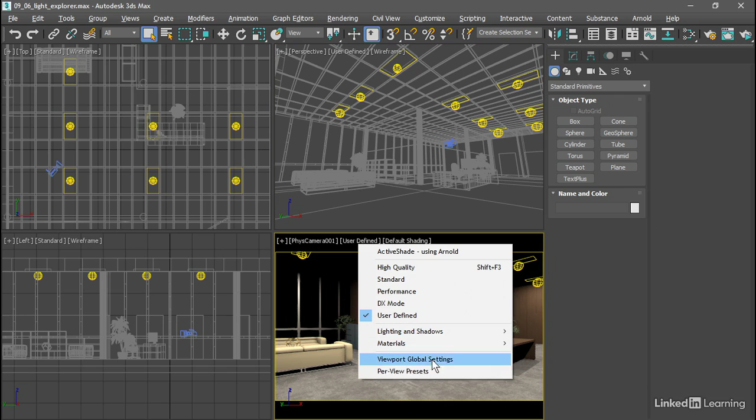Therefore, to see the effects of making changes in the Light Explorer, we want to set up the viewport so that it matches the production rendering as closely as possible. And we do that using the Per View presets. As we discussed earlier in the course, in the Per View settings, we just want to make sure that the rendering level is advanced, and we are illuminating with scene lights, unlimited lights.

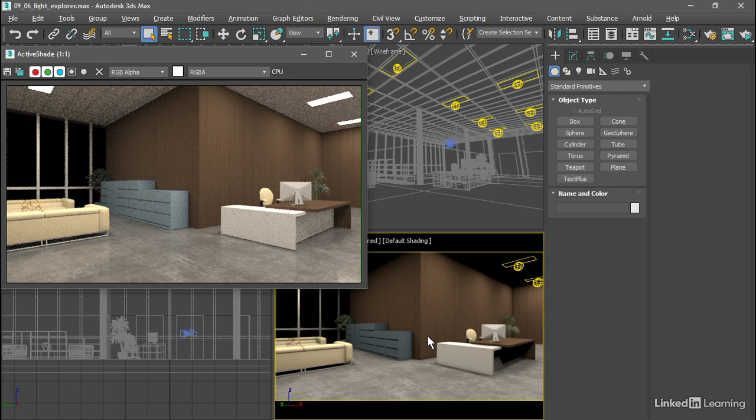Before making any changes to our lighting, we should make sure that our viewport rendering looks something like the production rendering. So let's do an Active Shade. And we can see that the viewport rendering is pretty close. There's no ray tracing in the viewport, so we don't have any proper reflections or any diffuse bounce, so the ceiling is rendering as black. But otherwise, we're getting a fairly decent representation of the final production rendering. I'll close that Active Shade.

And let's open up the Light Explorer. It's found in Tools, All Global Explorers, Light Explorer. All the lights are listed. I've got 10 rectangle lights, and these are all instances. So actually, if I make any change to one of them, it will affect all of them. If I turn light on, off for any one of them, then they'll all be disabled.

But other aspects such as visibility are not instanced. So for example, I can toggle the visibility state of various lights individually, or I can turn them back on again. I can also select lights from within the Light Explorer. So I can click on one of these lights and it will highlight it in the viewport and select it so that, for example, I could go into the Modify panel and adjust some of the parameters that are not found within the Light Explorer proper, such as the Kelvin value.

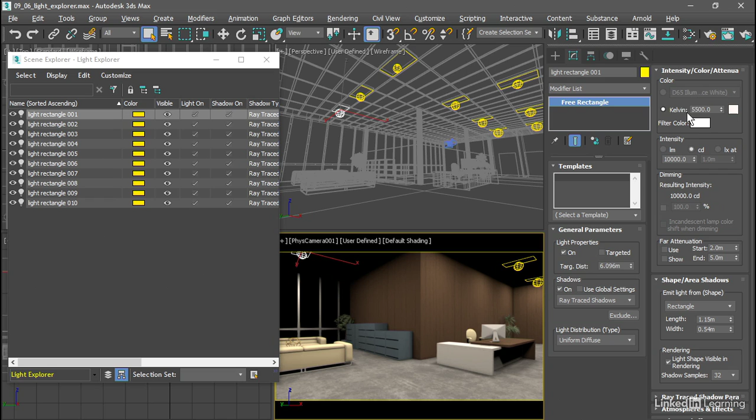There is one very important parameter within the Light Explorer that we want to see. I can expand this window a little bit. Way over on the right is the light intensity in candelas. We can move these columns around. I'll click and drag that light intensity column over just to the left of the light on switch so I can get at that more easily. And I can shrink that window down again.

I've got a light intensity of 10,000. 10,000 candelas is approximately 30,000 lumens. And we can see that over here in the Modify panel with one of those lights selected. Switch the intensity display over to lumens, and it's about 30,000. I want to talk a little bit more about how I arrived at this value. As I described earlier, it's a workaround to avoid using exposure control.

If you're trying to reproduce some real-world lighting scenario with specific intensity values, it can get complicated. If you just plug in the physically accurate value, the render exposure will almost always be wrong, especially for interiors. The image will almost never be the correct brightness. So for example, these light fixtures are putting out about 3,000 lumens. If I set them to 3,000 lumens here in the Modify panel, then my rendering is far too dim.

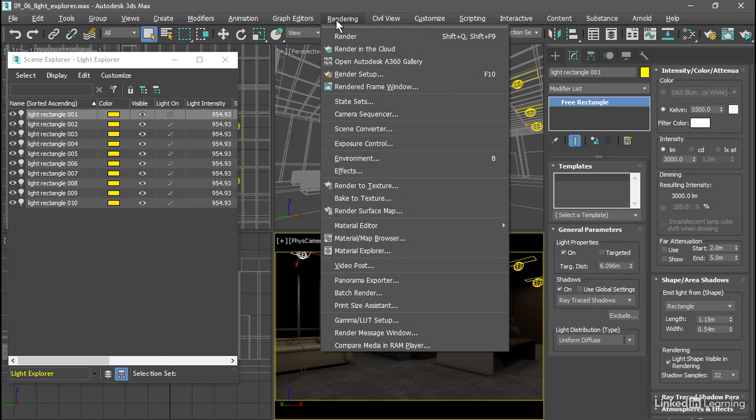We see over here that the corresponding light intensity in candelas is about 950 candelas. To deal with this dim rendering, we could adjust it with exposure control. And just for reference, that's in the rendering menu, exposure control. And I could try turning it on, set it to physical camera exposure control, and turn off use physical camera controls if available. That way I can adjust all cameras with this global exposure value.

And if, for example, I bring this down to a value of 5 exposure values or open it up by 1 f-stop, I'm getting a brighter image here. But exposure control also has this image control section that cannot be turned off. All we can do is try to adjust these values and attempt to bring this into a linear curve, and it's frankly not really possible.

Even if I set the highlights to, let's say, 0.15 and the midtones to 0.55 and the shadows to 0, it looks like a linear curve there, but it's actually not a linear response curve. It has changed the contrast. And we can see that if, for example, I bring the exposure value down even further to 4, we're getting good contrast here, but we cannot change that contrast in post effectively because it's going to be burned in.

It's a much better idea to just save out the raw image without this contrast curve burned in. So again, I don't recommend using exposure control. We could just turn it back off again and instead adjust the intensities of the lights. Now, we could take this on faith. We could plug in the real world intensity values and hope for the best.

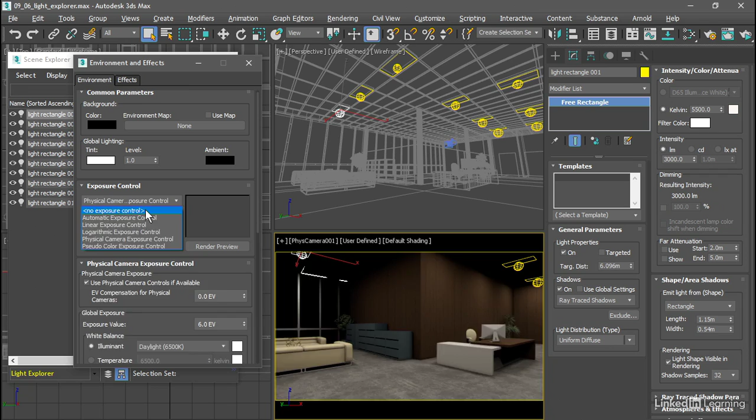So I do recommend exposure control should be disabled, and the best solution all the way around is to multiply all of the real-world intensity values by the same amount in order to bring the image brightness into the appropriate range. And then we will have full control over the tone mapping in post-production because there's no contrast curve burned in. So for example, for this lighting fixture, I want it to output about 1,000 candelas.

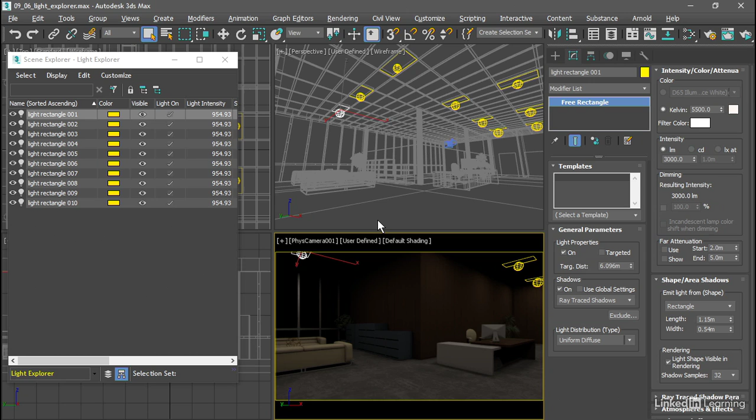I'm going to set the lights to be 10 times brighter than their rated intensity. I'll go up here to the light intensity, double click on that, and type in a value of 10,000 candelas and press enter. And now we no longer have that nice contrast curve and saturation that we were seeing from the exposure control plugin, but at least now we're not stuck with whatever the exposure control gives us.

We can adjust that contrast and saturation in post and not have any issues with banding or any other artifacts that might be introduced by trying to re-stretch an existing contrast curve. That's all about the Light Explorer and the rationale for not using exposure control, but rather using a multiplier for the light intensity.